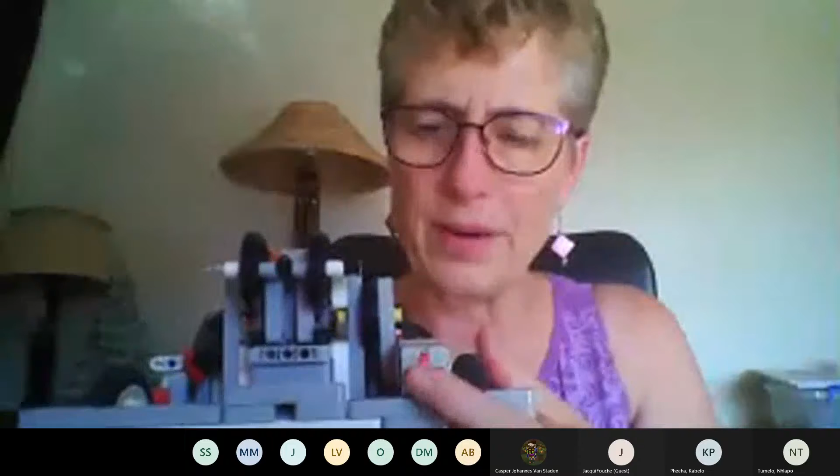This robot has got a touch sensor at the back, so it won't reverse into a wall. It'll actually stop as soon as it's pressed. As soon as this touch sensor is pressed, it'll know, oops, I touched a wall, I've collided with something.

So in all cases, when you add sensors, the data that you get you must be able to use in your programming. So I'm going to introduce two more structures in programming. Normally when you program, like what we've done up until now, it goes: we go left or we go forward, and then we stop, and then we go left or right or reverse, and then and.

So whatever you've programmed the robot to do is exactly what it's done. If you programmed it to make a sound, it'll make a sound. If you program it to go right, it'll go right. So that is linear programming - you go one, da-da, da-da, da-da, da-da. So everything you program is everything that your robot's going to do.

But now, in programming there are only 3 structures. We've done the one, so you've got 2 left - yay, we're nearly there. So the one is looping, where you repeat something.

So if your robot goes forward and backwards and then makes a noise, and you want to do it 10 times - forward, backward, make a noise, forward, backward, make a noise - you put that into a loop structure to say, take these 3 icons and repeat them 10 times. So then you've got repetition.

You don't always want the robot to dance, but your repetition is go forward - keep moving. It's not like what we had in M1 where it says do 4 rotations and then stop, because sometimes it might just be a little bit further. So with repetition we say keep moving, keep going until the color sensor sees red, or keep going until the touch sensor bumps against a wall, or keep going until there's something in front of you with the ultrasonic. In each case, you're using data from your environment in the programming of your robot.

So we've got sensors, and I put it like after basics - we've done the basics, and now we're moving on. Welcome to the adventure, it's so cool. And Tumelo is on hand to do our MOOC moment.

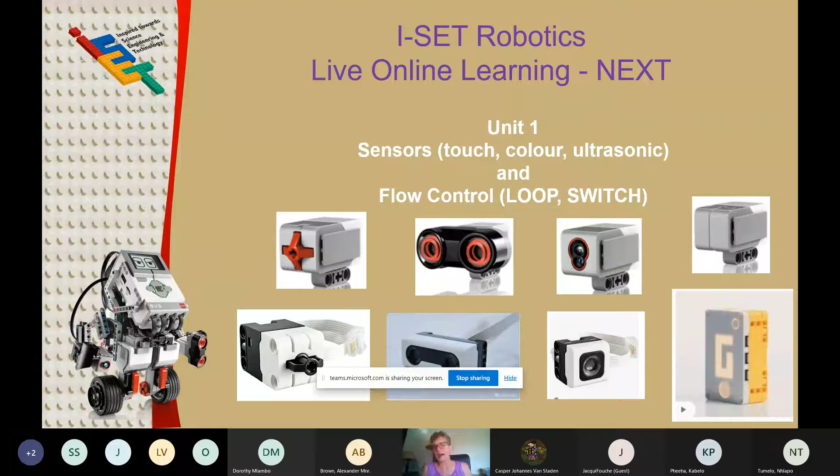So in general, there's a role of sensors in the evolution of robotics. As our sensors are becoming more sensitive, getting more data, it allows the robots to evolve. There's a very close relationship between the two, and that is part of going from senseless to sensible robots.

So we attach them to our robots - we have to attach them in two ways. One, it must be rigidly fastened to the robot, but it must also have the wires. So there's two ways. But if your sensor's not attached to the brain, you're just not measuring anything.

Why do robots need sensors? It's the same reason why we need eyes, ears, hands, and taste - we need to be able to take readings from our environment.

There's an interesting article, maybe you can Google it, about which sensors are critical for the safety of the robot. That's interesting, because if your robot is doing maybe a firefighting task where it's got to detect an increase in temperature, well then it needs to have a temperature sensor, one would think. If it needs to not collide with things, it needs an ultrasonic. So there's a whole lot of sensors that are critical for the safety of the robot, depending on the function of the robot, of course.

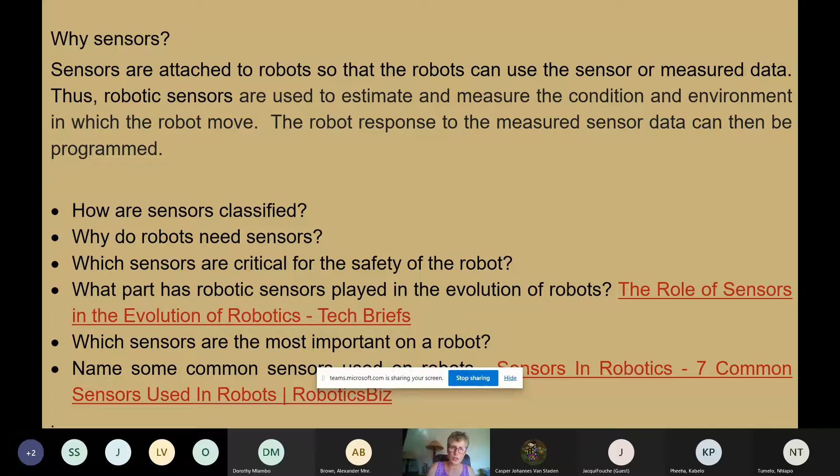What we're trying to get is useful input data. Remember the input, process, output - we need to get useful data. If we get useful input data, we can have better processing and more reliable output. Calibration is one thing, we'll maybe touch on it tomorrow. You need to know that what you're reading is what you're reading, and correctly reading it, otherwise your response to your reading is not correct.

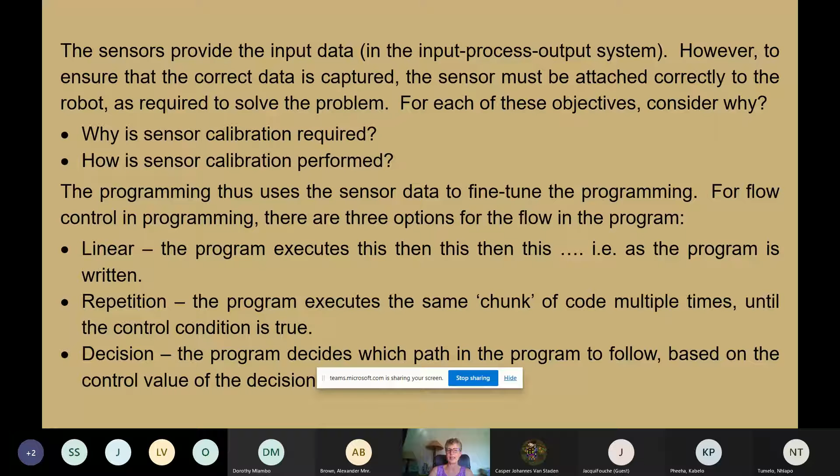So there I've just said the three reactions or flow controls to your programming are linear, repetition, or decisions - where you decide which one, how you're going to use your input data. So any sensor, and there's quite a range of them, is used to detect or measure some physical property of the environment, whether we measure the light, temperature, color, or the distance to an obstacle. But we need to have reliable input data.

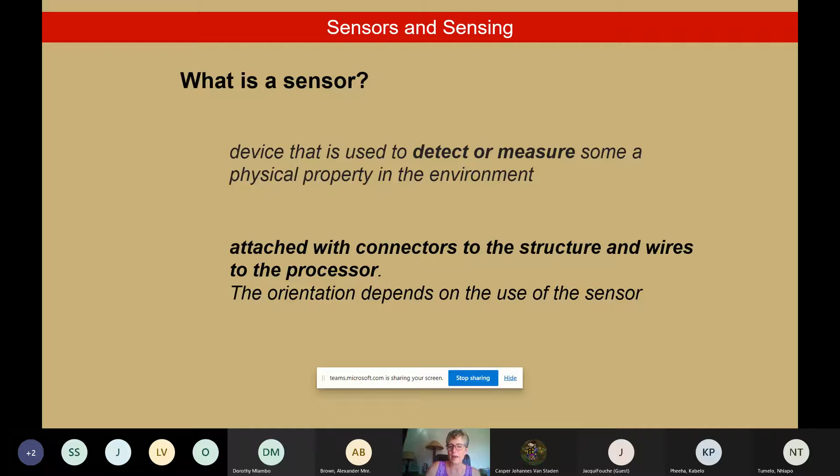That's just how you connect it - you connect it into the brain with a wire, and it's got to click. The gyro is how it turns, the color - you actually have to find a color or the ambient light in the room around, or reflected light. I'll explain that tomorrow. Ultrasonic we can do today, and then the bump, whether you bump, press, or just release it.

So you can hold it in, and as soon as you release it, the robot will go.

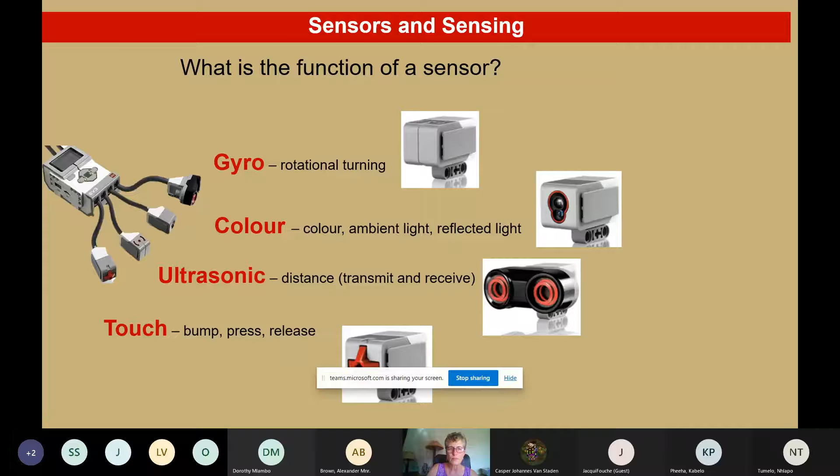Just by way of programming, when you do linear, you do this, and then this, and then that, and then that, and then that. That's a linear approach to programming.

For those who are doing EV3 Lab version, your flow controls are on the orange tab. I'll show you now what theirs looks like. Let's do the looping. Looping is where you're going to repeat something over and over again.

A typical thing would be an ultrasonic. An ultrasonic is fitted at the front, so we can detect an object. A color sensor would be facing down. Usually you can put your little finger underneath it, but not touching it, about 5 millimeters.

I'll also show you tomorrow when we do color sensors, the impact of interfering light. It has to be attached properly or rigidly with pins or connectors, and it also has to be connected with a wire. If you look, ultrasonic is in port number 4 of your EV3 brick, a color sensor is in port number 3. The 3 doesn't matter, but the 4 is really important.

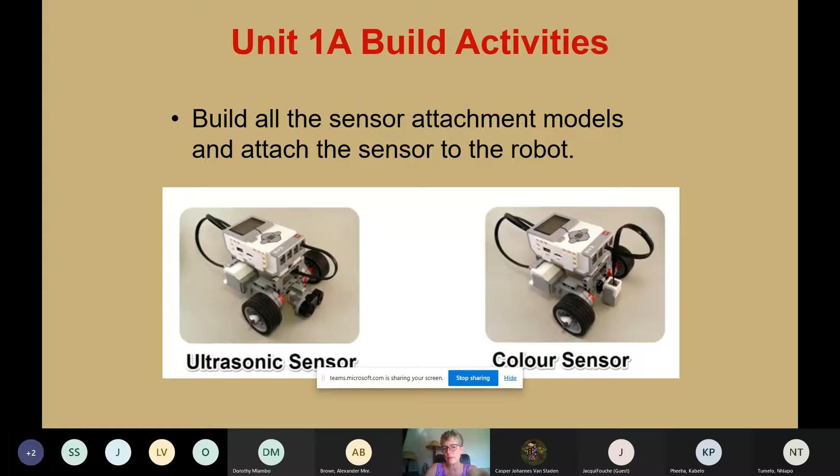A touch sensor - why would we use a touch sensor? Well, obviously if you have a touch sensor in front, so you don't bump into an object, and for those who need to reverse without looking back, you need to know when you're reversing into an object.

But some teams have also put it on like this, so instead of finding a program, they just press this, and we use that kind of like as a starter connector. You just hit it and it'll start moving.

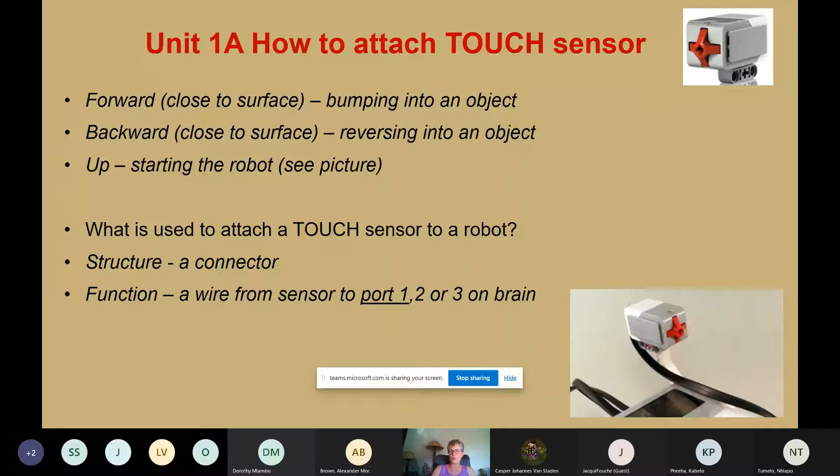But you're using input from your environment. The ultrasonic is usually attached in the front, and it's to measure the distance to the object in front of you.

I'm trying to warn you as coaches, the learners don't always quite get this right. They sometimes attach it too high. So then your transmission and your receiving, where the wave has to actually reflect back, is missed. So it doesn't actually pick it up.

Yeah, I would say like this. When you're starting with it, see that it can pick up a square box or a flat surface, that it can pick it up. An ultrasonic doesn't do well on a rounded surface. Then you would need to turn your ultrasonic up, vertically.

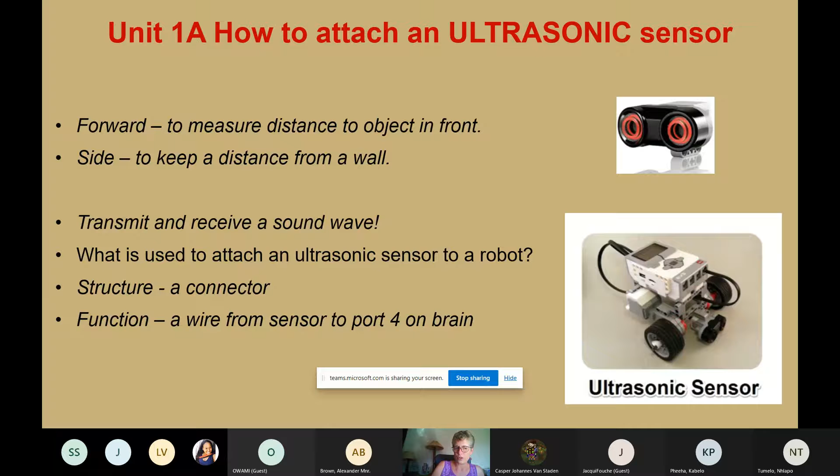But yes, so try it like that. I'll do some examples with you tomorrow and I'll show you. But also, it's got to be firmly attached to the bottom there.

My color sensor - this is what we'll definitely do tomorrow. But you can either go down so you can find the color, or follow a line or find a line. This color sensor would be here to find a line, so it's in the middle. If you're going to follow a line, I would really move it over to that side or to that side, just ahead of the motor.

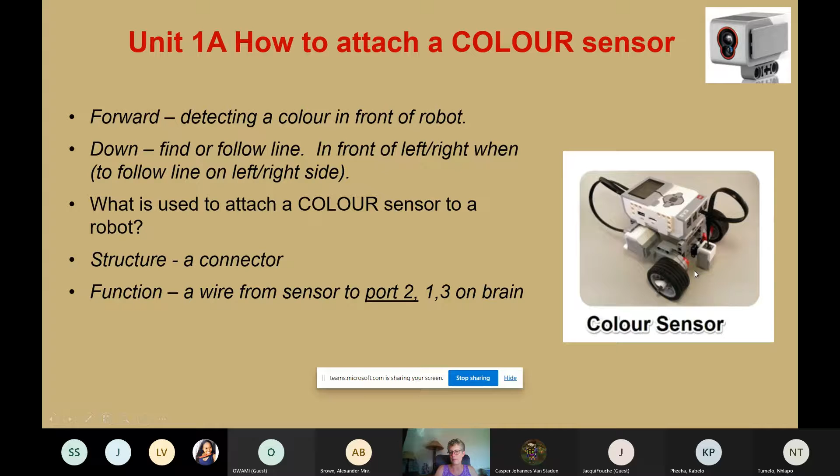The gyro sensor attaches on the side here, and for Spike it's inbuilt. Yeah, I would say let's park the gyro first. Get your learners to really understand the touch sensor and the ultrasonic sensor, and then we do color sensor, and then, if you can get to a gyro, that's awesome.

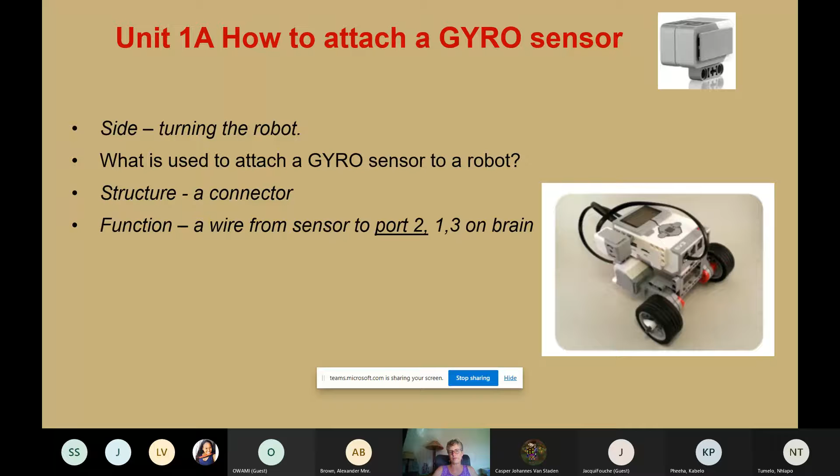There is a condition called an infinite loop or unlimited, and it'll just keep going. You have to recognize that and know that your robot's just going to keep going, which is one of the reasons why a robotics table needs to have sides, because otherwise your robots are going to go off the table and onto the floor, and that's a catastrophe.

Okay, so you need to have a specified value. When you do looping, you need to have a specified value, and I'll show you now.

Okay, so if your touch sensor was facing forward, you're going to keep moving until you bump into a wall. Okay, let's have a look here.

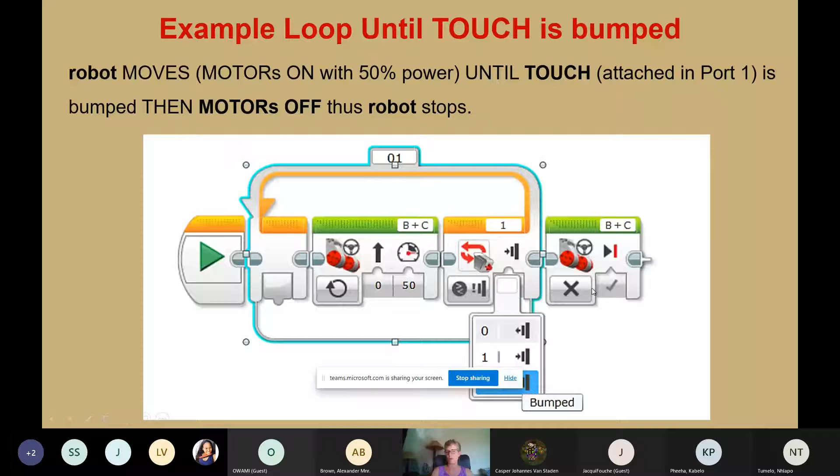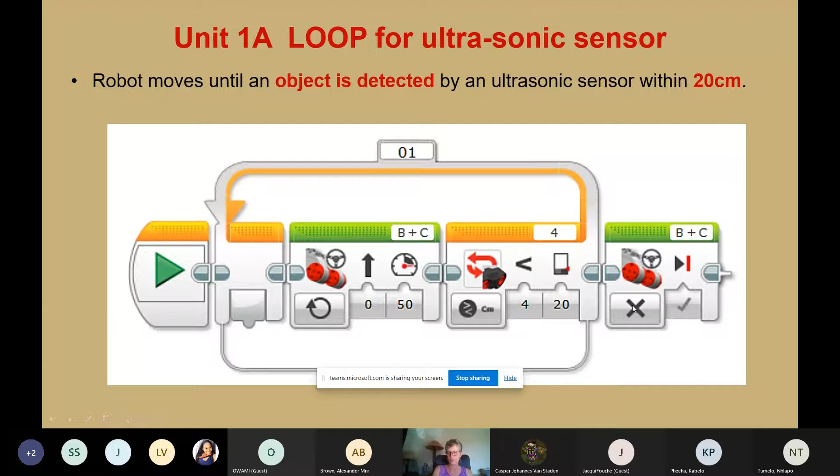Okay, let's have a look here. So we keep moving, 50% power, going forward, motors on, keep going until the ultrasonic in port number 4 sees something that is less than 20 centimeters. Okay, so as soon as you've got something coming closer than 20 centimeters, what are you going to do? You're going to stop. There we go.

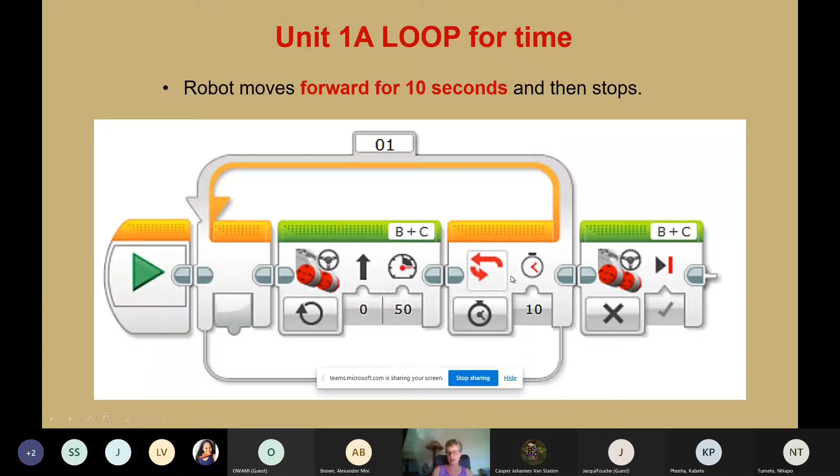All right, it's exactly the same. When you're on Spike Prime, you keep going until the touch sensor in port number A is pressed. Keep going until it's closer than 15 centimeters. Keep going until the color sensor sees the color red. It's exactly the same. The structure is exactly the same. And so you read the code exactly the same.

All right, so here again, if your color sensor in port number 3 sees red, it's going to say red. If your color sensor in port number 3 does not see red, it's going to say hello. Okay, so you can set any value, any way of measuring, any condition to your decision. Okay, decisions are really like if and else.

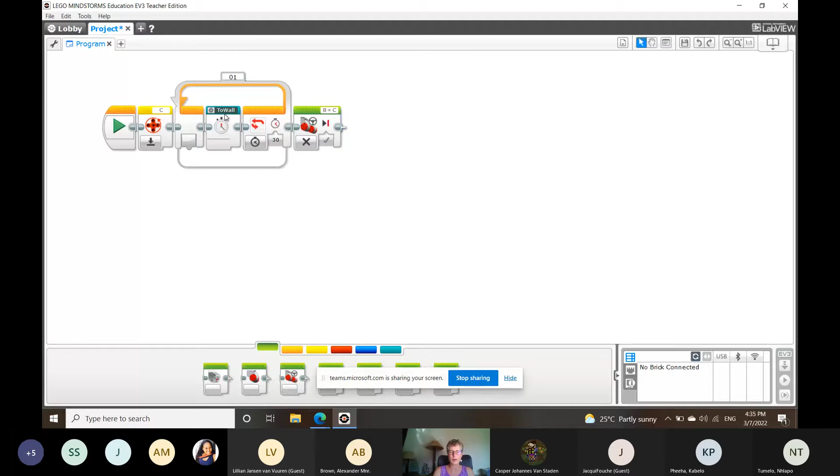You want to know what that's about, where it is? If you go onto the teal tab, there is your stored procedure or your my block. Those details in there, I want to do that. If you click on that, you want to see what's going on there - that's what's happening.

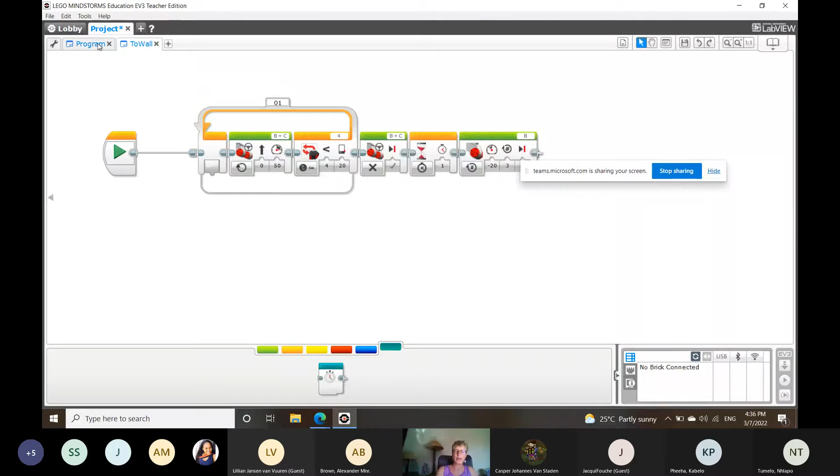Let me just take this out - just taking this part out here, and join that to there, and there. So it's colored up, and that is what's inside your loop. There it's all nice and neat. So you're repeating that - you're going to go forward to the wall.

When it stops, you're going to stop, then reverse, and that part you're going to repeat multiple times - in this case, 30 seconds. Or if you want to only bump into 10 walls, you can do a count - you count, bump say 6 times, and then you should be out of your maze. That's how you change your program using an ultrasonic.

If you're on there, you see that - it's just a different version of seeing your code. But I like looking at it like that. So if the touch - let's go color sensor. Where's my color sensor? If my color sensor sees color - no, that's not what we want. Color sensor, compare color.

So if I see red, then I'm going to say red. Let's go up here on the sound, there we go, and it says red. So let's say we have a color sensor's color, and we choose red. There's red, red, there we go.